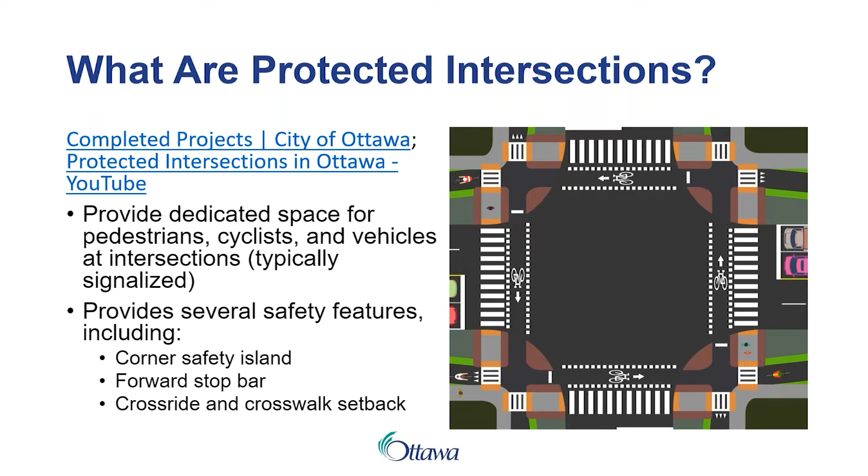So why is the City of Ottawa building protected intersections? I kind of mentioned it on the last slide, but it combines best practices from the Netherlands and North America. It improves safety for vulnerable road users, just from some of those features that I mentioned, the cross-ride setback and various other features in the guide. But it also improves comfort and perceived safety of cyclists. So not only are they hopefully having a safer facility, but they feel safer as they cycle through the intersection.

And that will ideally increase the cycling mode share throughout the City of Ottawa, as our facilities are seen as safer and lower stress, and that will attract the interested but concerned cyclists. So that's a goal and a vision of the 2013 Ottawa Cycling Plan, to provide low stress cycling facilities, and that's through the intersection as well.

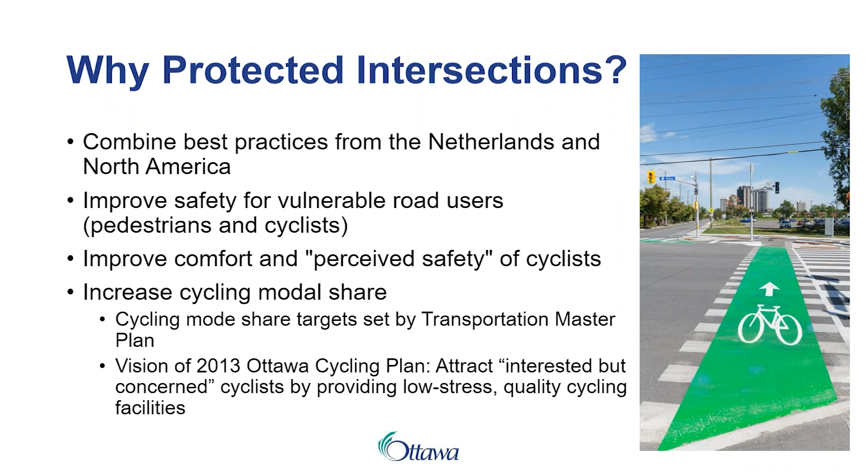The guide was developed by Alta Planning and Design as our consultant. It also included Accessibility Simplified as an accessibility sub-consultant and Moon Map that helped with the traffic signal considerations. There was an extensive internal technical advisory committee and steering committee. We also reviewed a lot of applicable regulatory and policy documents, best practice review of guidance documents and academic studies and that sort of thing.

We engaged with other cities, and didn't just look internally at the City of Ottawa, but also looked at the City of Toronto, City of Vancouver, the City of Fremont as well, who are all leaders in planning and designing protected intersections. And finally, we did some observations at constructed protected intersections. That's an advantage that we had because the City of Ottawa had been building protected intersections for some years. So we were able to look at ones that had already been built and see what worked and what didn't, and whether the protected intersections were working the way that we assumed that they would be.

Finally, we did an on-site workshop with accessibility stakeholders.

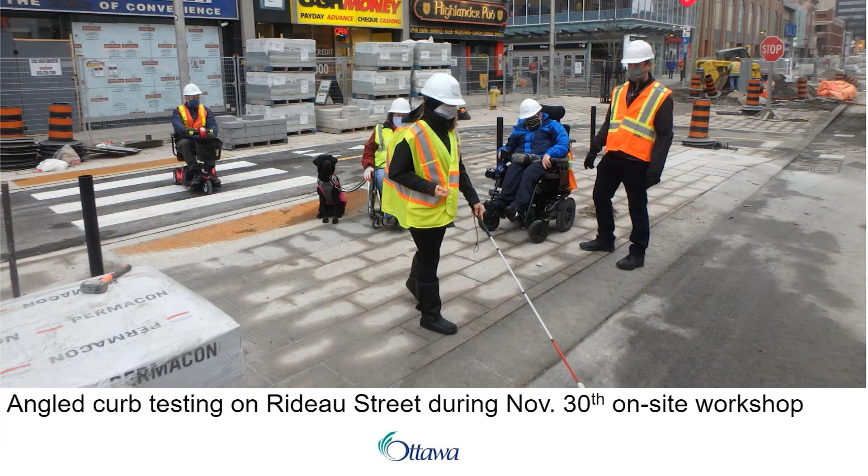So the contents of the guide. The guide is a framework for developing protected intersections. So it's meant to be used by designers, and it's organized into steps of the design process. Chapter 2 is guiding principles, and that is essentially what the City of Ottawa is trying to achieve for protected intersections: safety for vulnerable road users, low speeds at conflict points, those sorts of key metrics and things to think about while you're designing an intersection are included in Chapter 2.

Then Chapter 3, functional planning, talks about the context of the intersection. You want to identify utility conflicts, where the intersection is in the truck route network, the transit priority network, and various contexts like that, and constraints that may restrict the ability to provide a certain protected intersection that you actually want and may need to compromise on certain elements or something like that.

And then the next step in the process is identifying your corner radii for the intersection. And that's one of the most important things for designing the protected intersection, and to get right at the beginning of the design process, so you don't have to go back and redesign with a different corner radius.

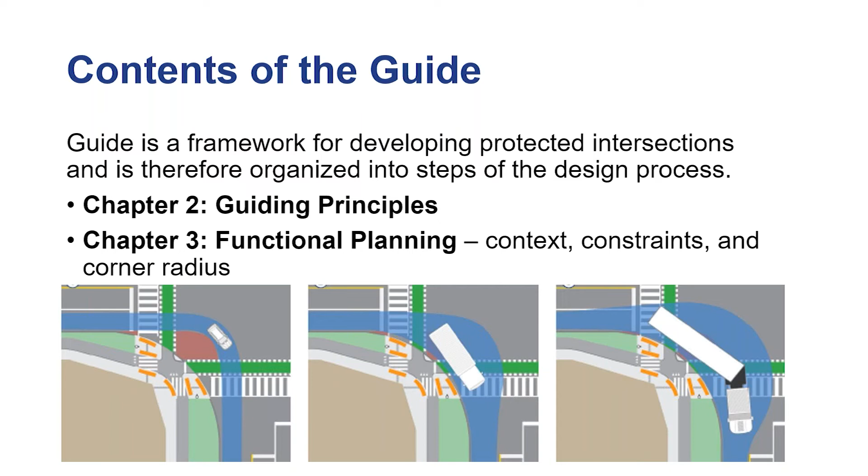The next part of the guide, Chapter 4, is on protected corner selection. So once you have your corner radius, you know your constraints, you basically know the space you're working with, and you know your context. So you can choose various corner types that you might want to work with for the protected intersection that you're designing. This is just showing 2 of the 7 different corner types. These are probably the main ones.

So on the left is a standard protected corner. It's unconstrained. There's a pedestrian refuge for the pedestrians to cross the cycle track and wait at the road edge between the cycle track and the road. And that just separates out the two crossing points and allows them to have a shorter signalized crossing. And then the cyclists can cross the pedestrians in a yield control kind of crossing and then get to that forward stop bar.

On the right-hand side of this image is more of a one-stage crossing for pedestrians. So they would cross both the cycle track and the road at the same time in one signalized motion. But cyclists that arrive on a red light would have to wait behind that crossing. And it also makes a longer crossing for pedestrians. So there are some advantages and disadvantages to each of these options.

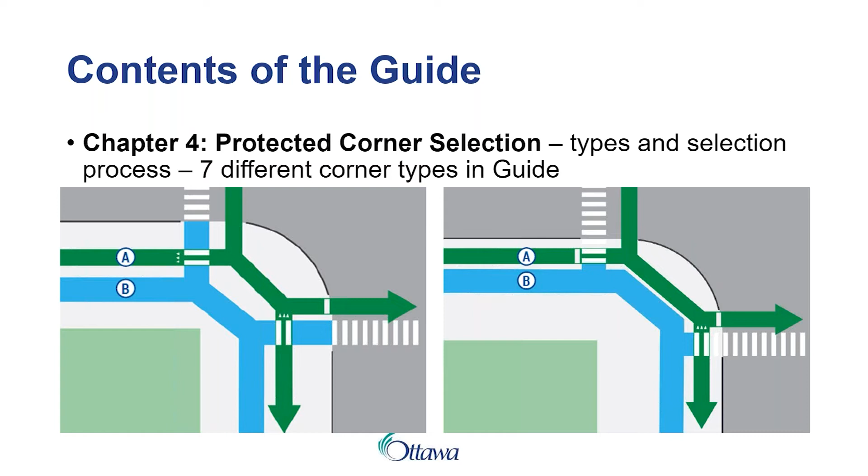But the image here, oh, sorry, next slide. I think you are forgetting to do that.

Chapter 5, Functional Design, is really the meat of the guide. It's broken down into pedestrian navigation and access, pedestrian safety, mitigating turn conflicts, bicycle safety and comfort, and transition. Next slide.

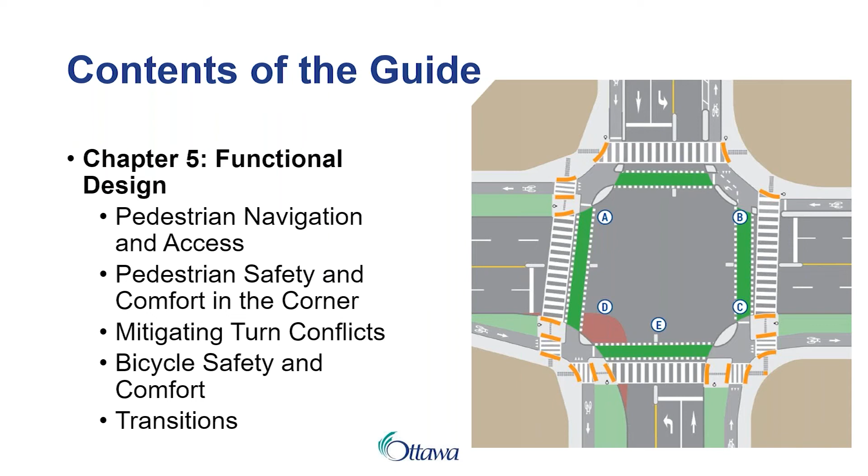So some of the key things that we wanted to provide guidance on were the pedestrian refuge size, which had been a subject of debate prior to the Protected Intersection Design Guide. There's now a standard depth in OTM Book 18 as well, and that was one of the documents, the draft OTM Book 18, that we reviewed for this guide.

But we also just looked at how large it needed to be to comfortably fit somebody in a mobility device, where the accessible push button would need to be located, and those sorts of things, how to place attention TWSIs on it, and came up with a minimum target depth of 2.7 meters. So there's a minimum depth for providing one of those pedestrian refuges.

There's a little bit of guidance on the radii and when you might place a corner apron, and the materials that you possibly use for a corner apron. There is also guidance on cross-ride setback dimension, which is dependent on the corner radius as well. And we made it a little bit dependent on corner radius based on the work that the City of Toronto did,

because if it has a smaller corner radius, the turning vehicles are going to be more perpendicular to the crossing, even with a smaller cross-ride setback. So that allows some variation of the cross-ride setback based on corner radius. And again, that really highlights how important the corner radius is at the beginning of the process.

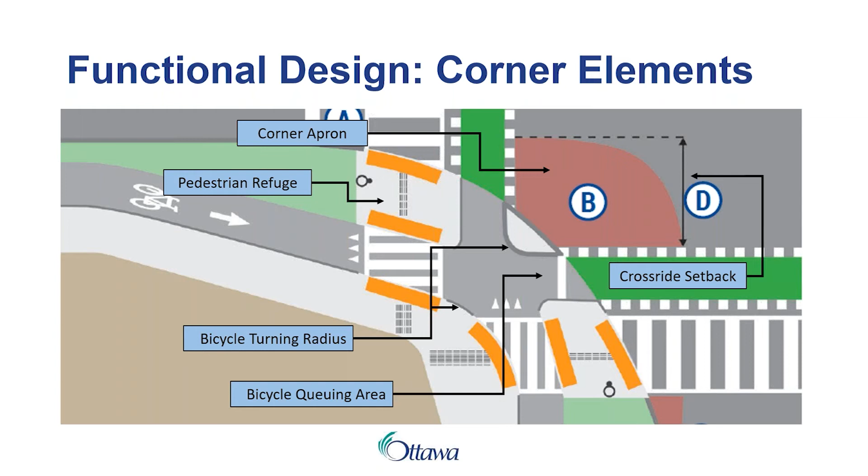A heavy focus of the guide was accessibility considerations. You'll see that kind of repeated throughout the guide. We tried to make sure that it was a key message that you read as you continue through the guide and not just one standalone section. Bicycles are always meant to yield to pedestrians at these yield-controlled crossings, so there's bike yield to pedestrian triangles. There is the accessible pedestrian signal; we provided some typical locations, although that is always up to the final traffic signal design. But that gives you an idea of where they might be placed.

As mentioned, we tested various types of curbs, and the City of Ottawa landed on using half-height curb delineation between cycle tracks and sidewalks or pedestrian refuges. So that is a 60 millimeter height half-step barrier curb between the cycle track and the sidewalk, and again, between all cycle tracks and sidewalks, or cycle tracks and pedestrian refuges.

There's the attention TWSIs for crossing the cycle track and crossing the road, but a new type of TWSI that we're recommending in protected intersections that wasn't previously used in the road right-of-way is directional TWSIs. If you ride the LRT, you may see them in stations, and they're meant to guide pedestrians or transit users with vision loss to key areas of interest, like the elevator or the accessible waiting area in LRT stations. In the intersection context, they're meant to indicate where the crossings are.

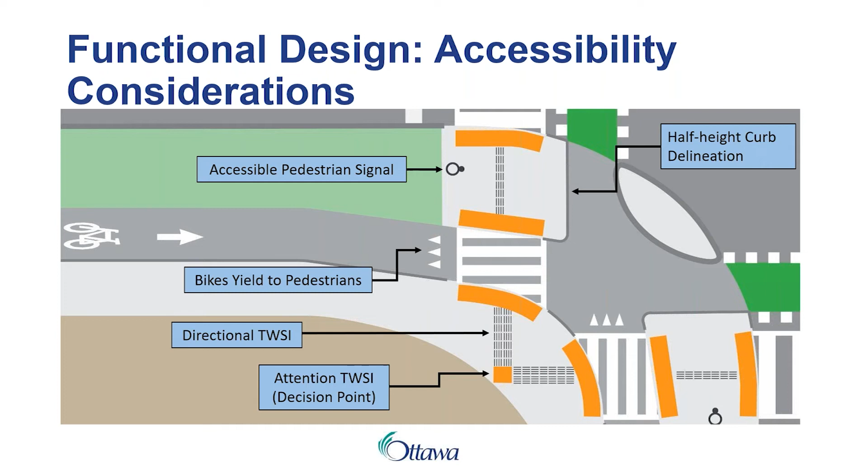Another really important thing identified in the protected intersection design guide is a maximum taper angle, which is sort of like a minimum deviation in the straight path of travel for a pedestrian. The goal should always be a perfectly straight path of travel for a pedestrian walking along the road and then crossing the intersection. But through various constraints that can't always be the case. In protected intersections in particular, because of the target crossride setback, the crossride needs to be a certain distance from the road edge. If you don't have a large boulevard on the approach, you need to taper the cycle track and the sidewalk further away from the road at the intersection.

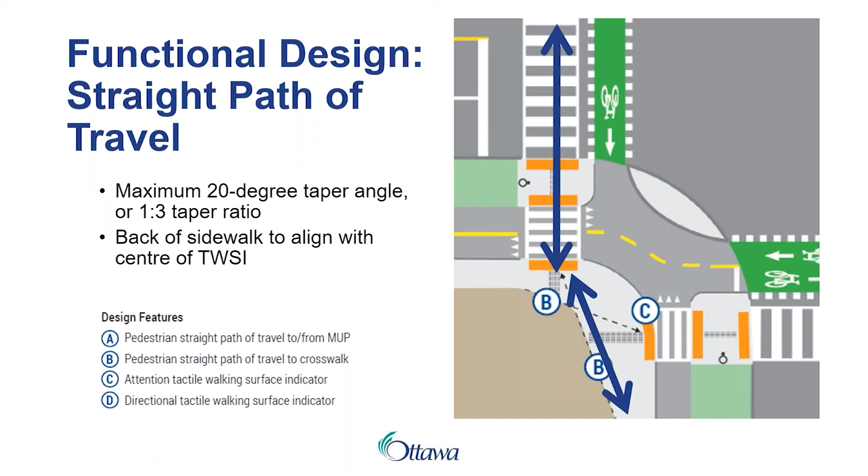So how do you know what the taper angle is? We identified a 20-degree taper angle for the sidewalk, which follows similar guidance for the cycle track. They don't have to taper at the same angle, but they often do. So it's a 1 to 3 taper ratio, or about 20 degrees. The back of the sidewalk should align with the center of the first TWSI that the pedestrian encounters. That helps somebody with a cane who is shorelining along the back edge of the sidewalk. Shorelining is a word that I learned through this process. With their cane, it will hopefully lead them to the crossing, and the directional TWSIs, as already mentioned, will help identify the crossing location as well.

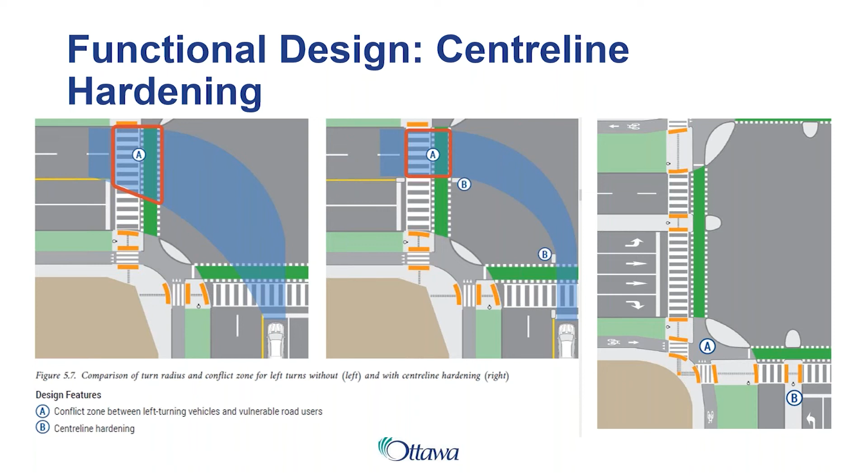And finally, not finally, but I always want to say finally. Chapter 6 of the guide is detailed design. So we're past functional design, and there's some guidance on considerations for material selection, or more guidance on the directional TWSIs and application of pedestrian guidance. Some recommendations for elevations and drainage, and considerations for road surfaces for seasonal maintenance.

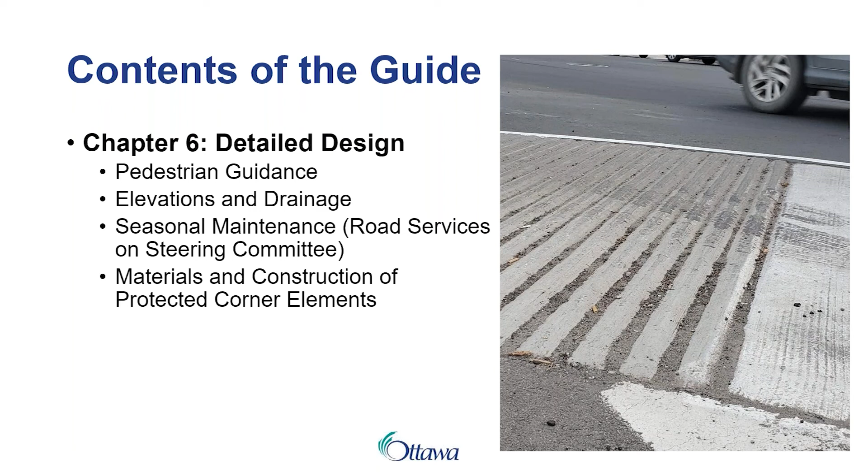Included is a 3D sketch of a protected intersection corner, and that should just give you an idea of where all the various half-height curbs might be between the cycle track and the pedestrian areas and how those are developed. And also a sample drainage pattern, providing drainage to curb inlets at the road edge and also curb inlets between the sidewalk and the cycle track, supplementary curb inlets.

Now that is just an example, though. There could be other solutions, and the supplementary curb inlets, we don't currently have a standard for those as well, and you can provide all drainage to just one catch inlet at the road edge. That would, of course, be a lower cost solution. So that's something that should be looked at.

But in the 3D view, you can see, at the corner safety island, you have full height curb to really protect the cyclists and the pedestrians in the waiting areas, and you have those half height curbs between the pedestrian refuge and the cycle track, and you have various ramping up and down for both the pedestrians and the cyclists, and how that drainage would work. So I find this image quite helpful for understanding how all these elements come together at the corner. Next slide.

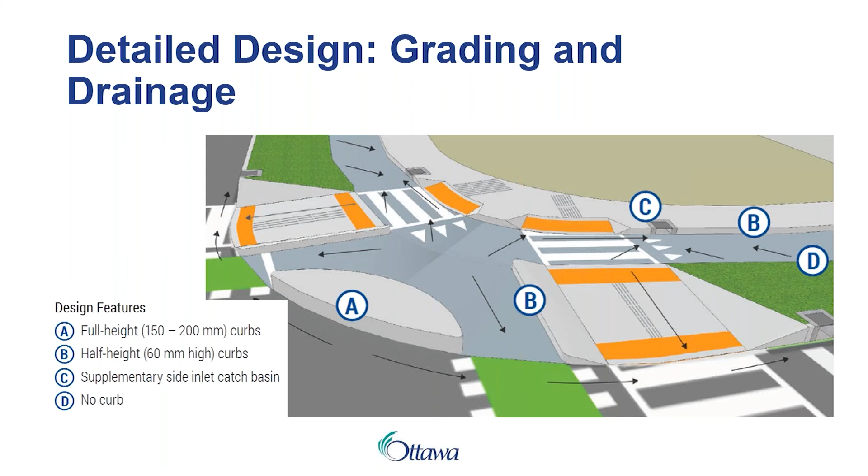A very important part of the guide that was perhaps not considered early on in some protected intersection design was how the geometry of protected intersections, which does help in terms of lowering the risk of turning vehicle conflicts through the cross-ride setback and through some of the features that we've already talked about, is meant to be paired with signalization measures as well.

So if you have a really high volume of right turning traffic across the cross-ride and the crosswalk, you are going to want to consider protected turning phasing to separate the right turning traffic from the pedestrian and cycling crossing in time in the signal phasing. So that may take the form of just a leading pedestrian interval or a leading bicycle interval for an extra head start in the signal phasing plan.

Or it may be a permissive green ball with a right turn overlap phase going at the same time as a protected left turn in the cross street. Or if there's a very high volume of right turning traffic, you may even consider a fully protected right turn phase. So right turning vehicles can only go when the pedestrians and cyclists are not going.

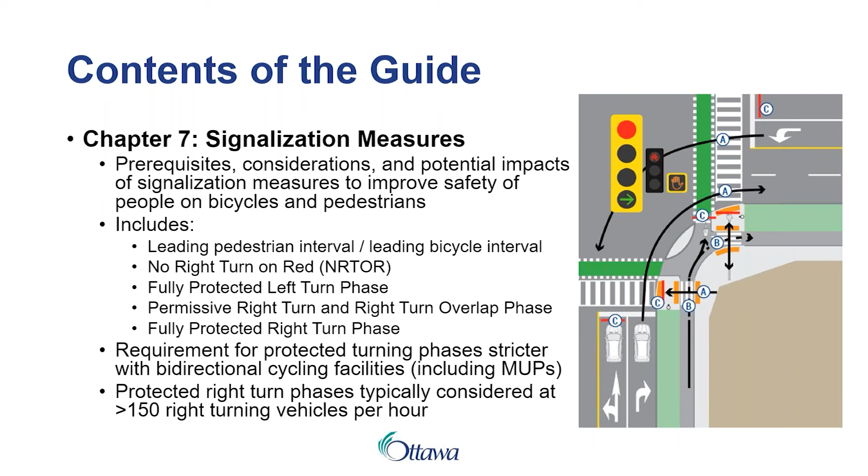So the Protected Intersection Design Guide has been out for several months, and people have been using it. Many people who are listening to this probably have been using it as well, and maybe are old hats with everything I've just been talking about. But some design issues or just design challenges that we've encountered even since the Protected Intersection Design Guide has been out, I'll go through in the next few slides.

So one is the need for right turn lanes. I really went over it just one slide ago. But if your right turning volume is high, you might need protected right turn phasing. To have protected right turn phasing, you need a right turn lane. And so we really want to protect for the ability to have protected right turn phasing if the right turn volume is very, very high.

In the past, if the capacity of the intersection was working okay with two through lanes and the right turning vehicles would share one of the lanes with the through volume, even if it was a high right turn volume, and that was functioning okay from a capacity perspective, then that was all right, even if at some times of the day it might function as a de facto right turn lane. However, that just doesn't allow the protected right turn phasing.

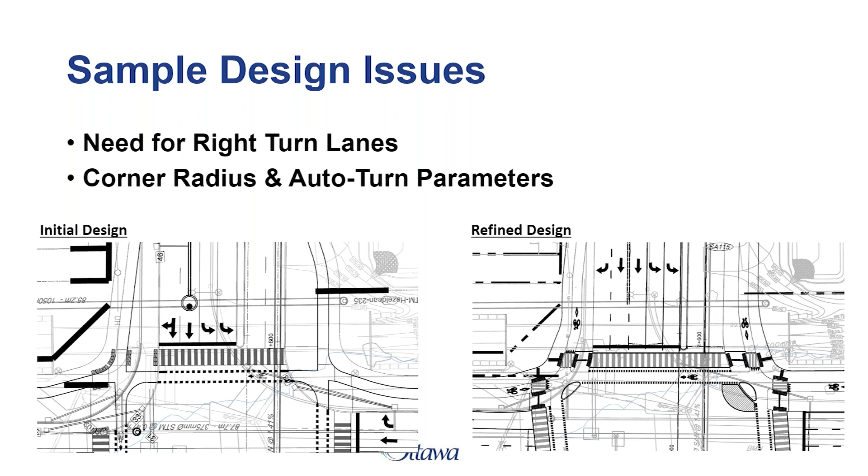So it's a bit of a feedback loop that you have to work with at the beginning of your protected intersection design to hit that ideal corner radius and lane arrangement. Another thing we're still seeing is not applying minimum cycle track corner radiuses, especially at the early functional design stage. This intersection, sorry, next slide.

This intersection, you can see it just has right angles on the cycle track at both the right turn and the left turn. And you may think, well, at the functional conceptual stage, it doesn't really matter. We'll fix that in preliminary details. But at this intersection, if a radius was applied for a left turn, for example, you lose most of your corner safety island, and it may not be an effective corner safety island anymore.

You might have to reposition your cross rides. You might not be able to fit traffic signal infrastructure. So that can be a real challenge. So applying those radiuses right from the beginning, right from the functional design stage, gives you a more realistic outlook to how the intersection is going to fit.

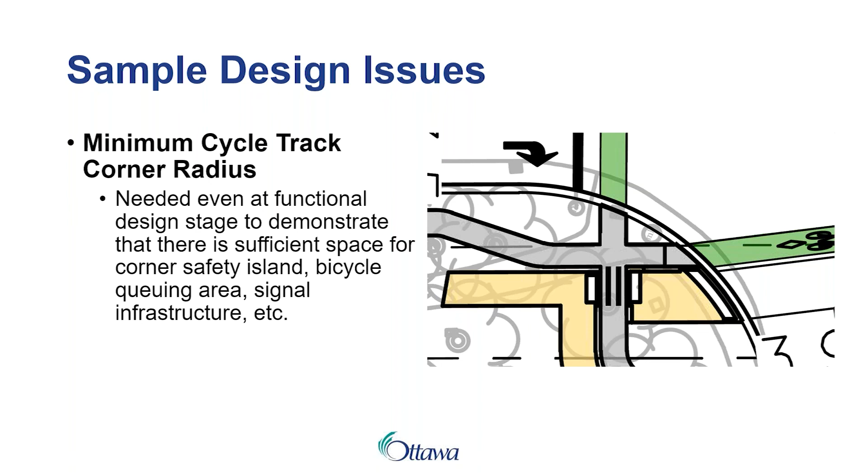Next slide, last slide. The last thing I want to mention is that the Protected Intersection Design Guide mentions ideal corner radiuses for motor vehicles, and those are really just ideal. You really should be using AutoTURN for arterial intersections and collector intersections with turning parameters, mostly based on the Toronto curb radii guidelines. So the ideal is not what you have to use just because it is mentioned in the guide. And similarly, the pedestrian refuge has a target depth, but that's just like the minimum target.